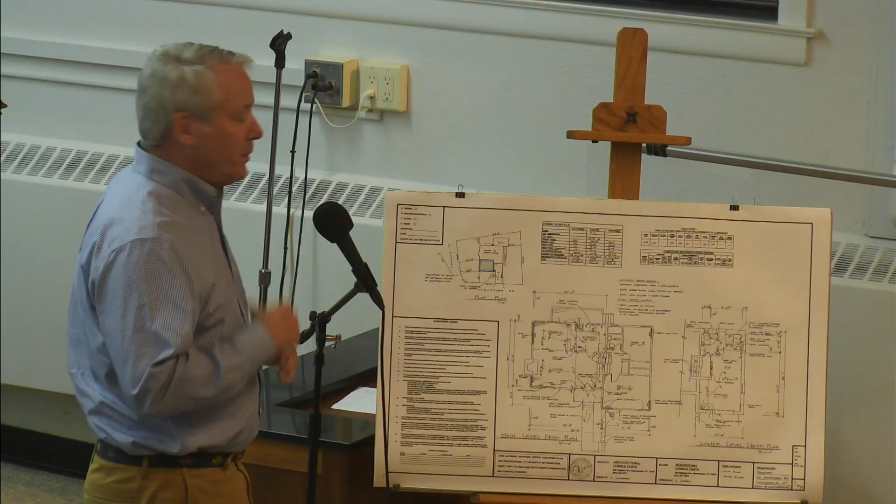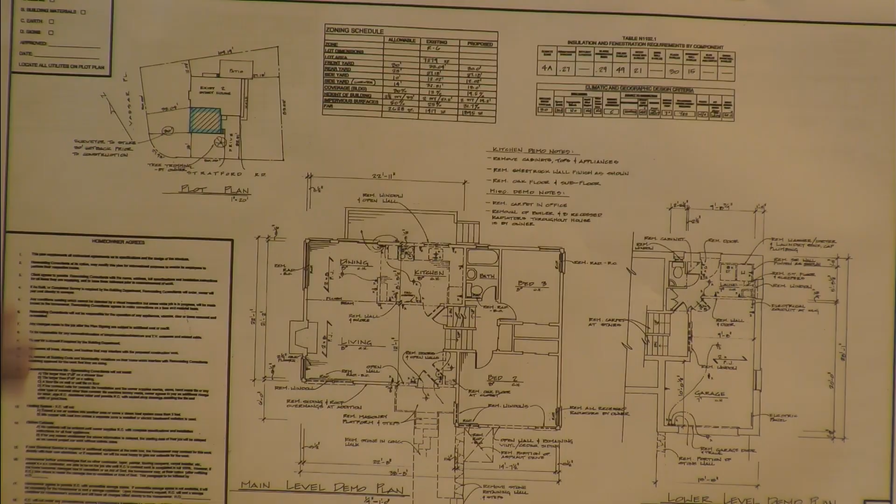We're on a corner lot, the corner of Stratford and Vassar Place, so we meet the zoning setbacks for a corner lot, and the addition is serviced by a lift. The whole reason for this addition is so that Mr. Harvey's 8-year-old son, who's mobility impaired, can come up from the driveway, come up a lift, and then get onto the first floor level, which, these are the existing conditions, and be able to access a brand new bedroom and bathroom that we're going to be building as part of this addition.

The first floor plan shows bedroom number 4, which is accessible on the main level, and it has a very large bathroom with the ability to roll into the shower and grab bars as needed.

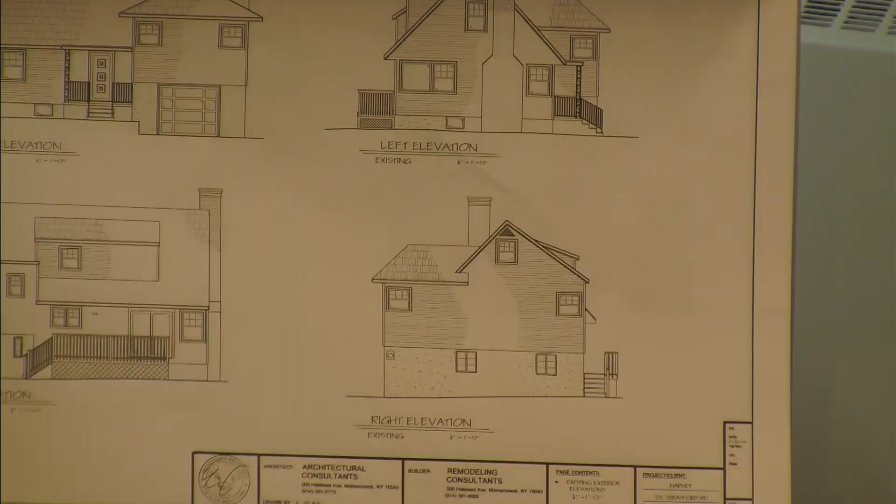So the challenge here was, of course, to develop something, an elevation that was pleasing. We did supply the existing elevations, and of course you have photographs. I'll start with the front elevation. Well, actually the rear elevation, we're just replacing some windows, and that really doesn't change much at all.

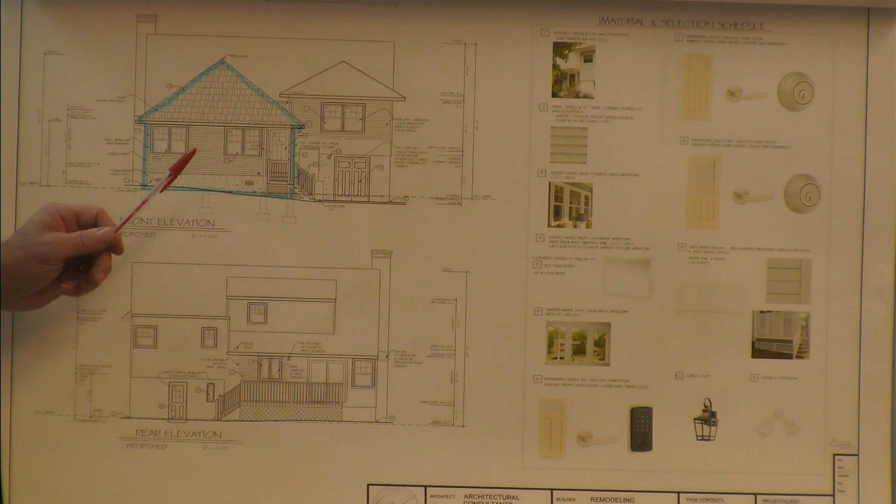So here's the front elevation. We have a hip roof that's going to be at the same pitch as the existing hip roof, which is a mid-level hip roof, so our fascia will be a little bit lower than the existing one. We have a series of windows going around, and of course we have a composite deck with Trex-type railing, which is accessible via stairs. Then behind that, we'll have the lift.

Our siding will match the existing, which is gray vinyl siding, so our new will match the existing. Roofing, too, will be asphalt shingle, timberline, charcoal gray, exactly like the existing. Same with the windows. We're trying to make it look just like the existing.

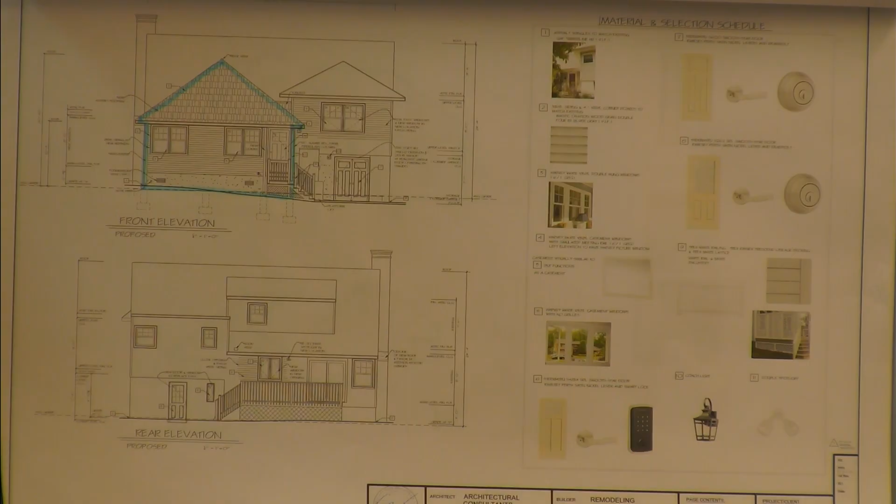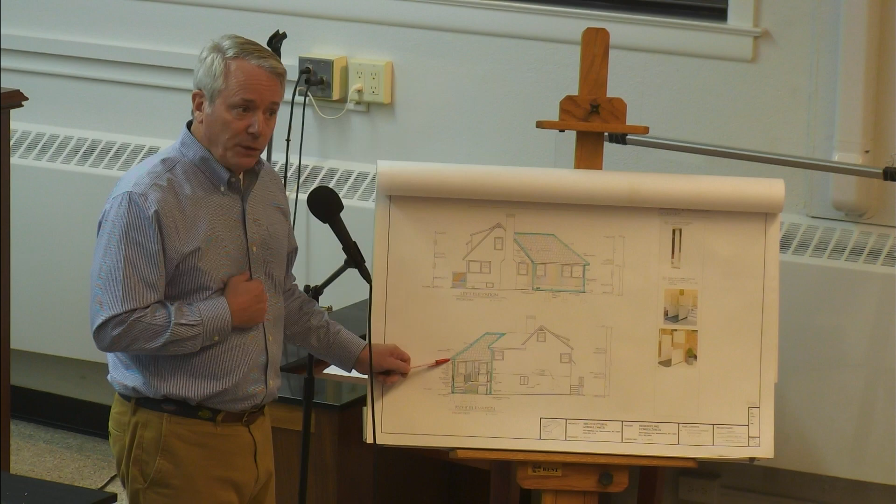Is there any exterior lighting that you're adding, or any additional information in terms of finishes? Yeah, the lighting that we're adding is going to be an area light that's on the corner column, included with it. So that's a security spotlight for the driveway. And then, of course, lighting that's in the soffit as you go down the porch. There'll be recessed lighting.

As far as the exterior of the building, what you've outlined with the blue, is that the new? Yes, I outlined in blue, this is the area of the addition. Did this here on my copy. I don't think you have that on yours, it's not outlined in blue.

Site plan wise, here we go. This is all the addition there.

I read through the application before, on the submission. Yeah, the only question I had, I think you addressed it, everything is matching existing, basically. Yes, right, all the finishes. That's correct, except for a new element that we're adding, like the railing and the lattice, which is going to be white composite material.

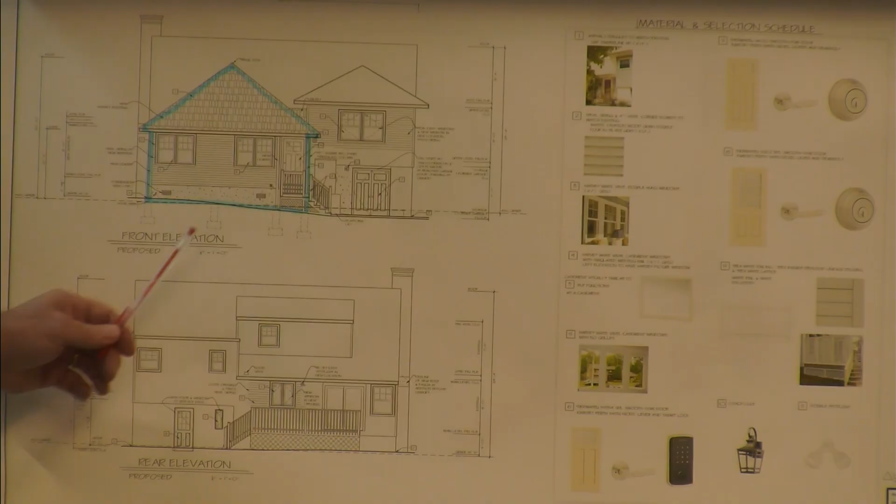Okay, and the doors that I see here on the material list, number 6 with the divided lights above, is that the front? Yeah, so we're replacing the main entry door, and that door is actually going to be set back behind, in that porch area. As you see here, we do have that listed. That's the one right there, number 6.

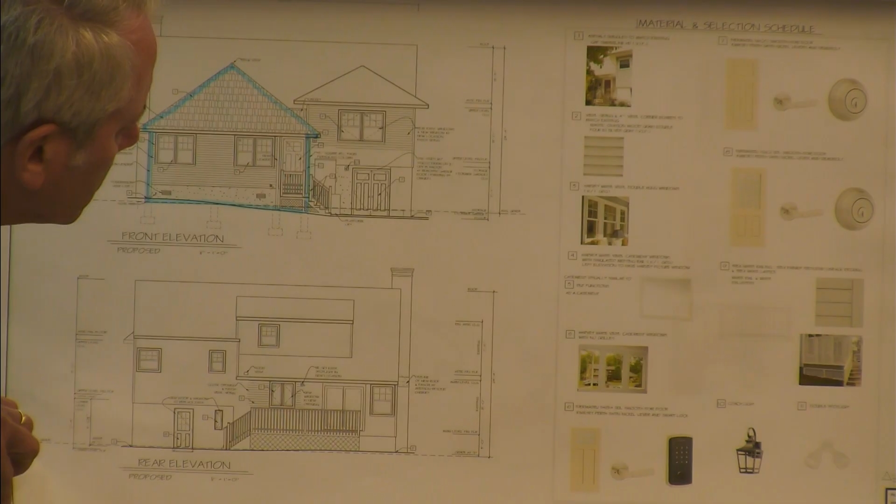Number 7 is for the, where does that belong? Yeah, number 7 is the back door that comes out in the laundry room. Another part of this project that doesn't really have any bearing on the front is that we're redoing the laundry room on the lower level, behind the garage. So you'd see that in the rear elevation on page 8A, right here.

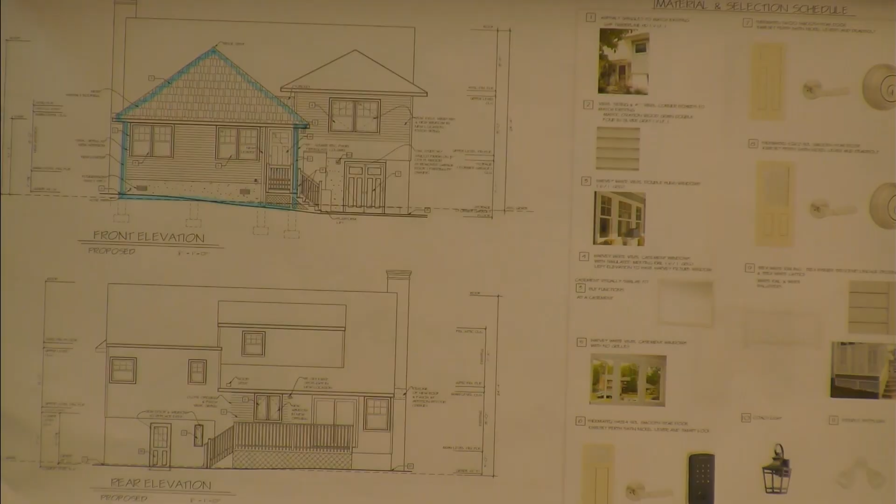The one on the rear coming out of the washroom, I think is door 8, right? Yes, this is door 8. So I guess she was asking where door 7 is, the solid panel one. Is that maybe interior? It's in the garage. Okay, great, thank you. Oh, I see, it's a double door on the front of the garage.

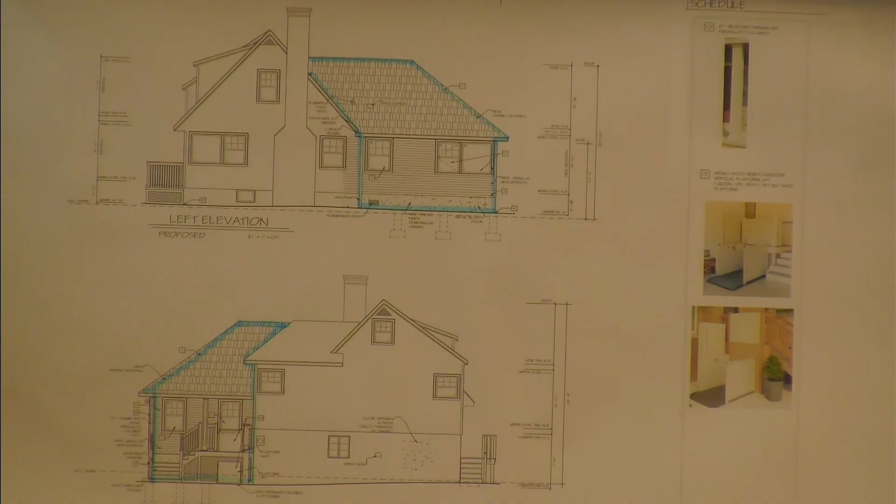So another part of this project is we're taking the front garage door, it's these two, and we're making a double door for storage access. So there's no longer going to be a garage door? That's correct, we're removing where the garage door was. That's correct, yes, that would be right over here.

In the current photographs, it's gray, and then everything's white, and the doors are white? Are they white, or are they this creamy color? The doors are going to come primed, and the paint will be applied at the owner's discretion. So you don't know what color the doors are? I'm going to say they're going to be white. Okay, that sound good?

I would recommend white to the client, and we can make that part of this submission, only because the other features of the house are white, the trim around the windows, things like that. The current front entry column is red, right? Is it red?

Just that it be specified, really. I don't think there's anything we have against the red staying, or... I mean, unless it looks bad, we're not going to ask you to change what you want. So if you want to do blue, that's fine, just specify it and give a color.

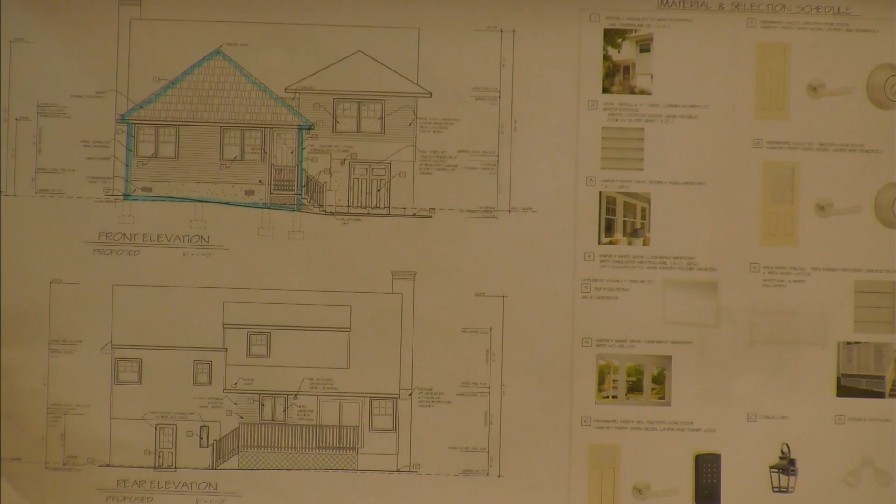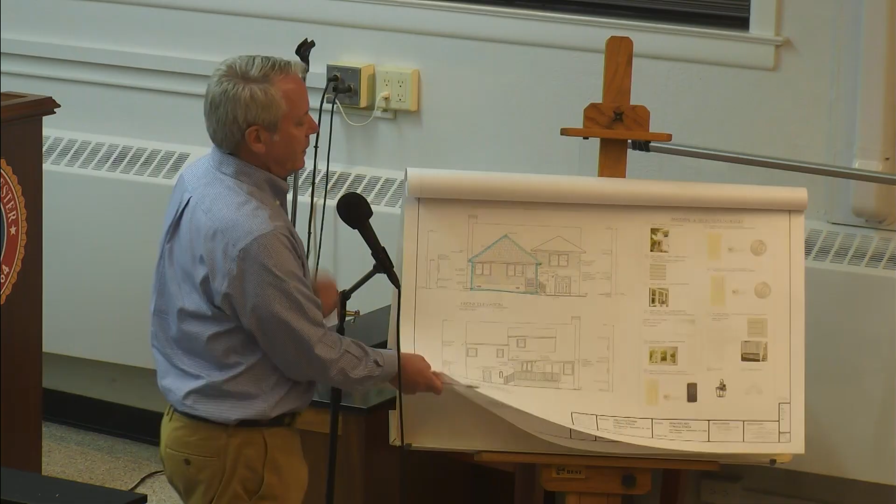Any other questions or comments, guys? Not for me. And the lift is also going to be white? The lift, as we see here, I honestly couldn't tell you exactly, but the selection we have here is a white lift, yes. All right, once again, we'll specify that.

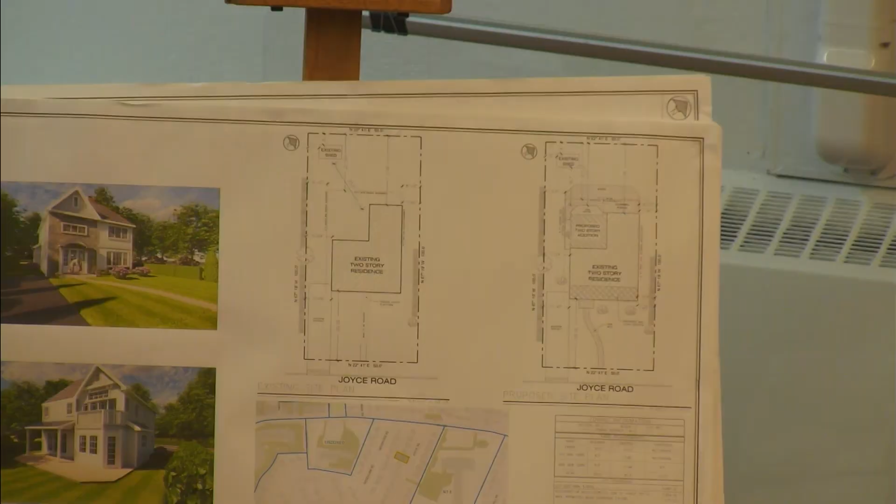The scope of work is we're proposing a two-story addition at the existing rear of the house, and we're also proposing a one-story, second-floor addition at the front to raise the roof. The house hasn't been renovated in many years, and we just want to update everything.

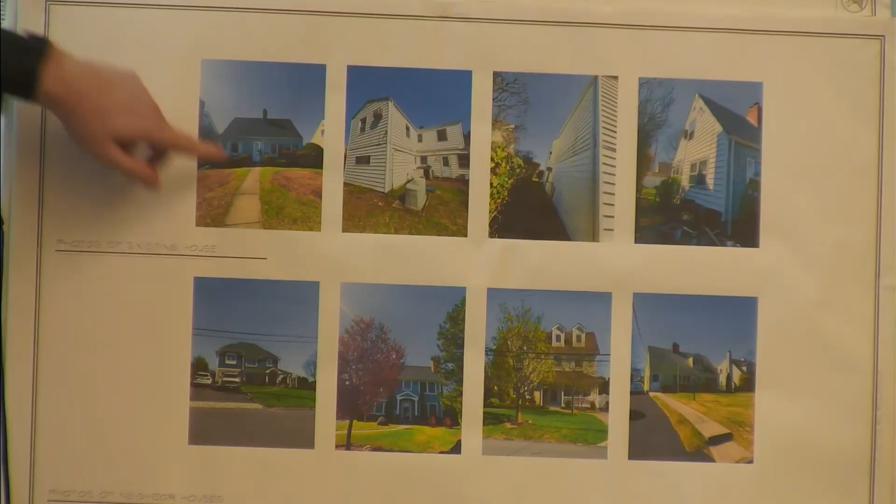I'm going to show a bit of the existing photos. The way it looks right now is just a flat, big roof right up front, and this is the rear area where we're proposing the two-story addition, and we're erasing the part here in the front.

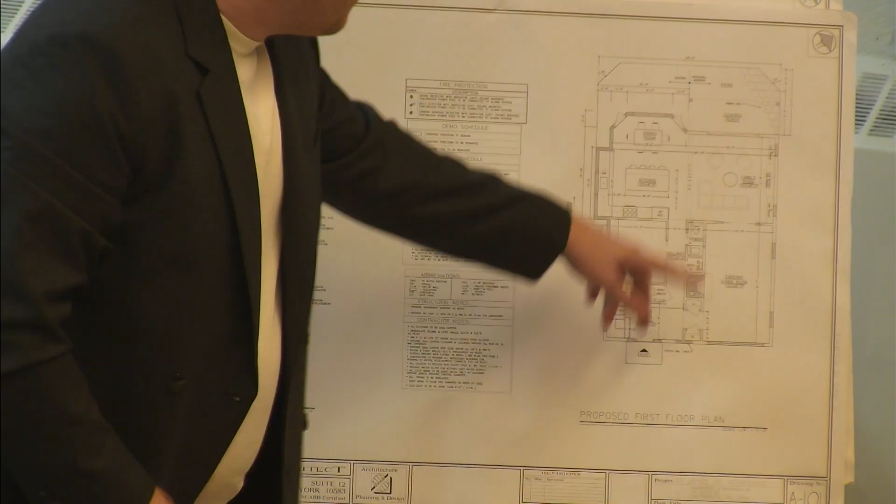If we go to the floor plans, when we first enter, we're proposing a two-story open foyer, and then we're going to have a big open kitchen, a family room on the rear. We're keeping pretty much the existing living room and the den as it was before.

Would you mind just using the microphone so that we can pick it up for the transcript? Sure, you can grab it. You don't have to take it off the thing. Yeah, you can hold it, it's easier.

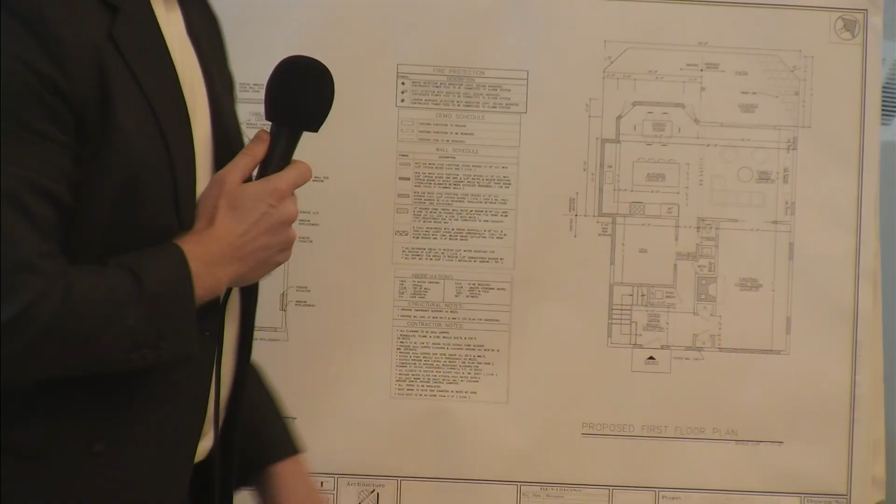As I was saying, we're keeping the existing living room pretty much as is because we have a fireplace that we would like to keep, and we're making a big open kitchen and family room with a breakfast and a dining area at the rear.

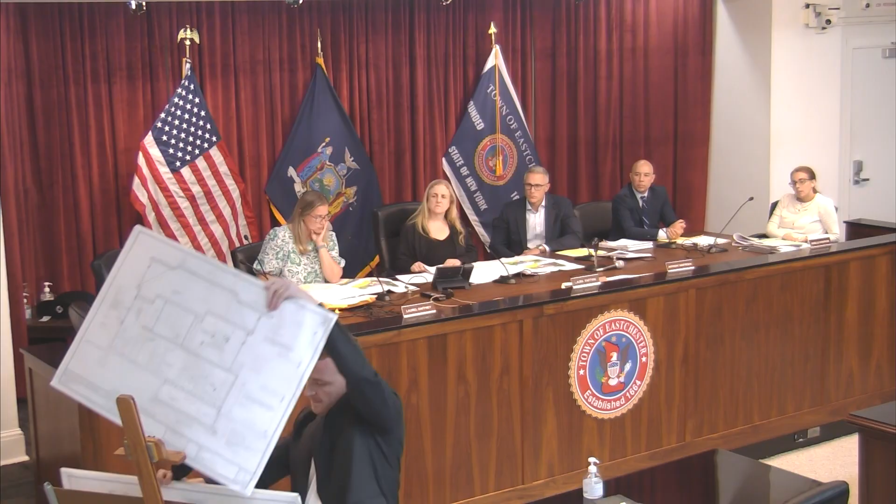On the second floor, we're proposing 4 bedrooms with a nice primary bedroom with a small balcony. We have 3 bathrooms and a laundry, which will be much better from what it was before to meet today's criteria.

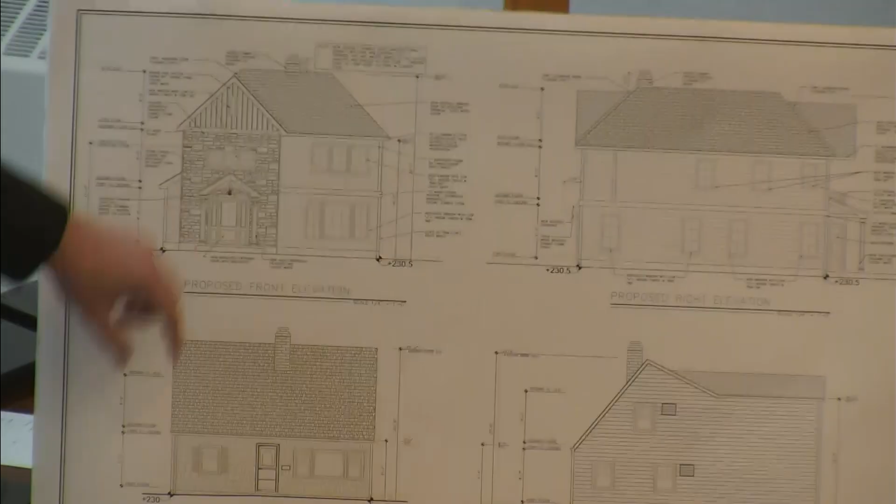If we go to the elevations, this is the existing where we only have this big bulky roof in front, and now we're proposing the 2-story entrance will be with stone, and then we're going to use HardiePlank, 7-inch exposure, and we're going to use board and batten again with 7-inch exposure.

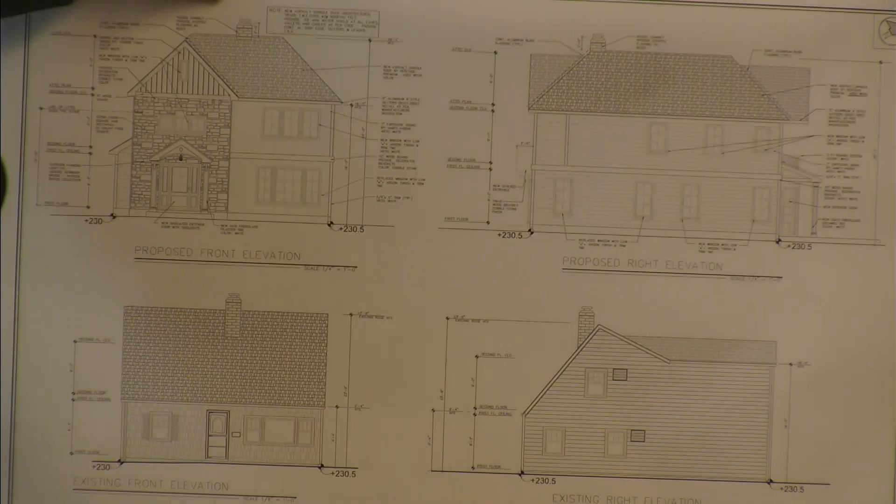The colors we're proposing will be Arctic white, and the stone texture basically is going to be rectangles and squares. On the side, we're just going to continue with windows. It was just a blank wall, so we're just putting some windows.

On the rear, this is a balcony area which is partially covered for the proposed primary bedroom. And here's the dining area on the first floor.

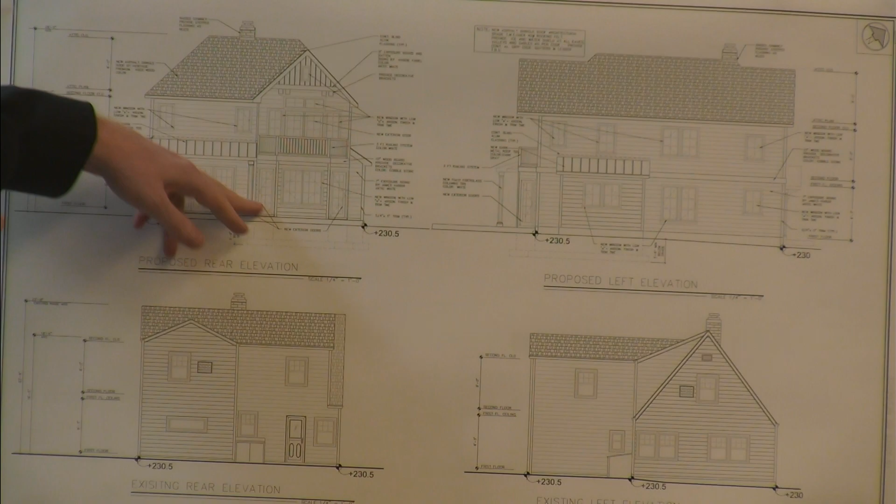I'm going to show a cross section as well. Our house does not have a basement, that's why we increased to get as many square feet as we could, because we're not proposing one and it didn't even have one. This is the primary bedroom area where we're increasing the ceiling to get a 10-foot ceiling in the area.

Here's the 3D renders where we can see the stone and the finishes. I also brought all the finishes right here where we have, this is the stone that is going to be used. I only brought a piece, but I have the catalog as well.

This is a HardiePlank that will be 7-inch exposure. And then on the upper part, on this portion, we're going to use the board and batten, which will be put on top of it and nailed to it like that.

On the back, we also have on this portion here a metal roofing where it's going to be a dark gray color, and I brought a color sample as well for it. The main roof will be asphalt shingles by Heritage, in the aged wood finish. These materials pretty much match the neighborhood, everything, all the materials are used in the neighborhood as well.

So the whole outside is going to be new HardiePlank? Yes, the whole exterior? Yes, everything is going to be.

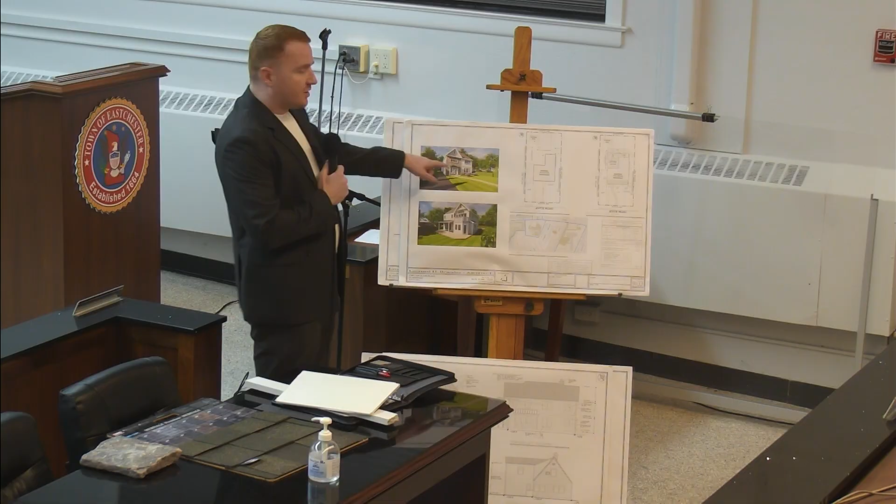And the windows will have the white trim, 5-inch Arctic white to match the color. We're also going to have a 10-inch board, which is a cobblestone finish, just a bit darker to match with the stone. This part here is like a 10-inch trim coming around. And that trim is darker? It's a bit darker versus the Arctic white, just to break it up a bit.

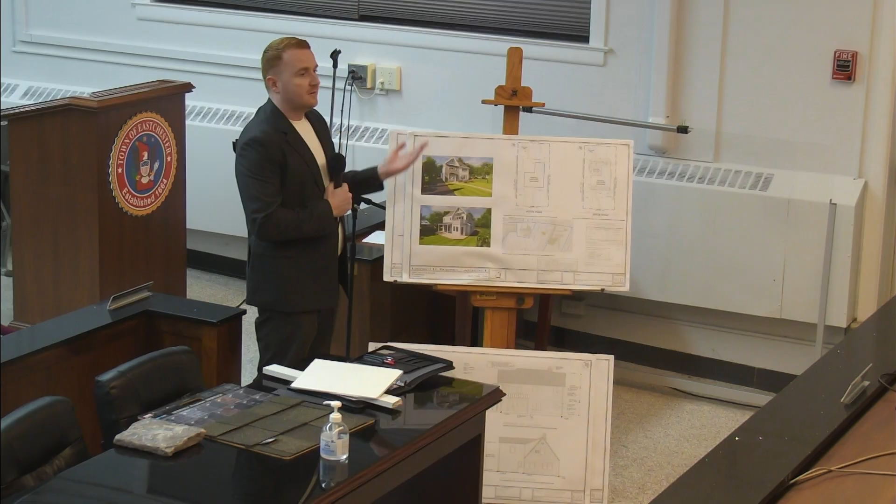All the existing windows are, of course, being replaced to insulate it to match what was before. We're replacing the front windows, everything, and the rest is new.

And the roofing you brought, it's gonna be that color? Because on these renderings it looks much lighter. I think it's from the print, but yes, it will be the aged wood color. That's what the owner liked as well.

I had a couple thoughts on this. Do you have any other stonework planned for the site or anything else? Because when I look at this, that stone jumps out at you, but there's nowhere else to tie it in on the site, and with only that front face there, it looks very much like a stone veneer.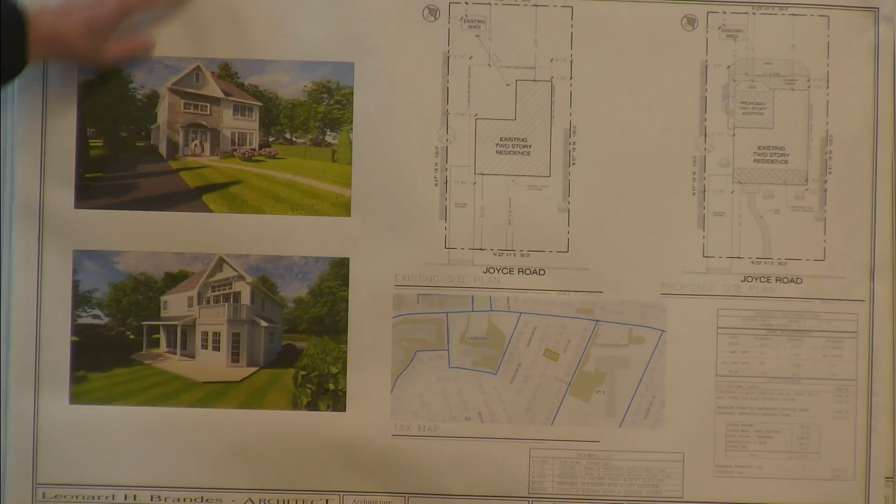It feels a little bit to me like there are a lot of styles going on -- there's stone, there's board and batten, there's HardiePlank, there's trim, there's standing seam roof, asphalt roof. It feels a little inconsistent to me around the perimeter of the house.

Well, the roof, I can easily make the roof -- we just thought to bring something nicer. It's even cheaper for us to make the roof all the same, if that's something you'd want. We can easily make asphalt the whole thing on the back, but we thought as a nice feature, probably to break it up a bit.

And even here, this board, it's not that different in color -- it's just like a trim board, just to break down the two levels a bit. It can even be removed if you think that's too much. I can easily remove it. I don't think the trim bothers me that much.

I don't know if it's the actual rendering that's looking a little cartoonish with the stone. Yeah, I also have the catalog with the stone -- it actually looks better than the rendering. I wanted to show you. But I understand what you're saying.

It is a little mishmash in terms of -- also the back, and I know this is the back of the house so you don't see it up front, but the part above the balcony just has a lot of windows, and then that big piece of kind of craftsman trim, the bump out -- it feels a little crowded, all of that together.

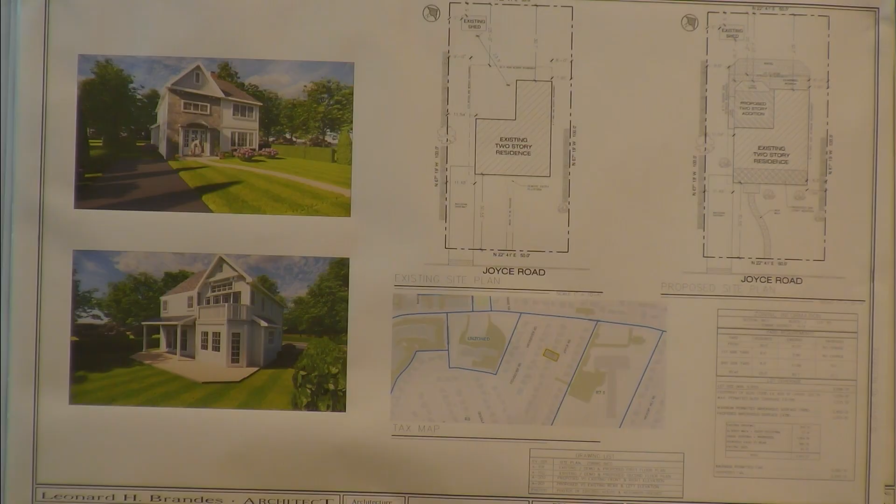I wonder if the whole patio being exposed might be better, with something like a pergola instead of the roof there. Just a consideration, but okay.

Yeah, there are a lot of windows and combination of windows, almost like on both the front and the back. There's just not enough repetition, not enough consistency, yeah.

Things get hodgepodgey. Here on the back is basically the family room, kitchen, and breakfast area, so we do need a window, and we want this big slider door that's gonna open. Basically, it's not the amount of window in general, it's that—for instance, the sliding doors underneath the roof have 3x5 lights on each of those windows.

Then you go to the ones up above on the porch, and you have those with thinner lights around. And then down below, the styles are all different mix—there's nothing consistent with the lights in the windows throughout those.

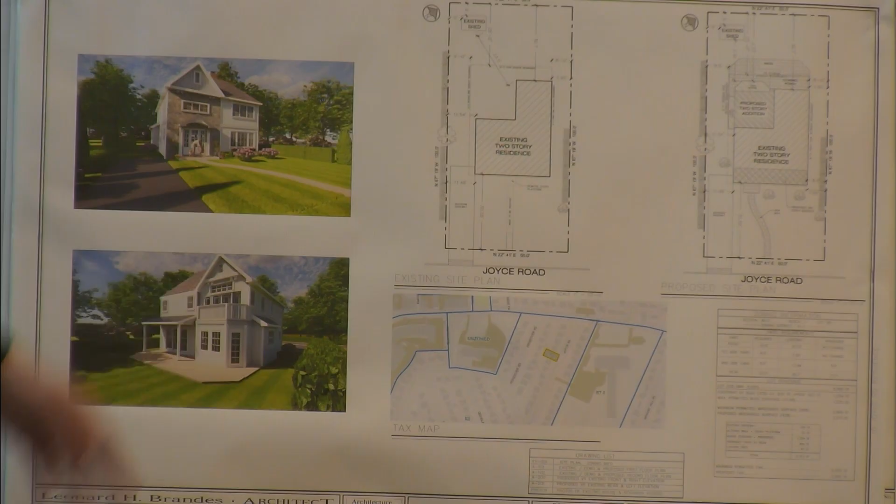We like to use a 7.5 inch on a 2x8, this way you have it long for the future. That's not shown here, that's inside basically. I mean, we have room for it, we haven't done all the CDs for this so we can adjust. We're definitely gonna adjust the size. It's gonna have a 7-8 inch space minimum between there, so that window is gonna get pushed higher up.

Also, I think another thing with the mullions that's throwing it off is that even though you have the two transoms above, they don't correspond - the width of the glass is wider than the height below. You need to do something to make it look like they belong together. It was only because we have a cathedral ceiling coming in, so the roof is angled. We wanted to get the whole thing but my structure doesn't let me because I have the rafters inside that are 2x12s, so that's why we brought it to the center point.

So only the slider has the windows above, and the two side ones don't have it. That I don't mind, but if you look at the center ones and the way the transoms are divided, they look... I don't know if maybe you can achieve that, because the door has more trim, right? The door has more substantial band of trim around it.

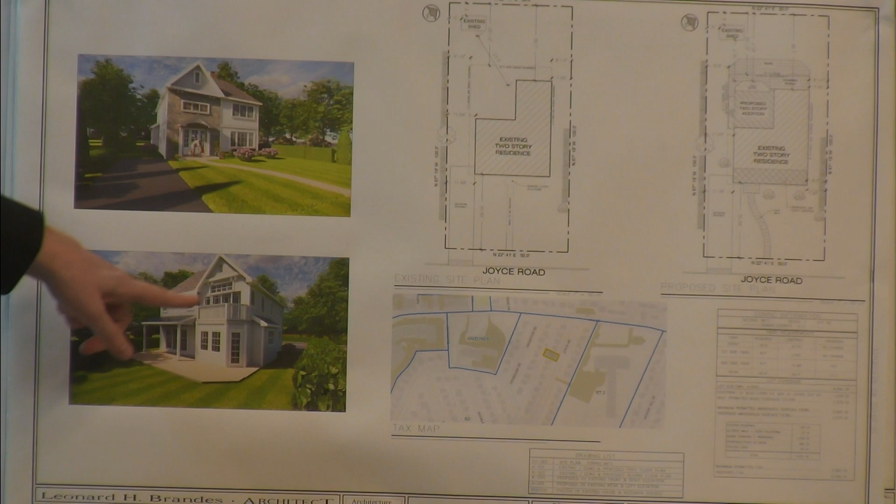Can the windows be... well, probably when we do that, because these windows come with a transom, so I guess we can look into that. Might be even easier to eliminate that problem with a space between - I'll have to look at a different door system, similar but maybe as one piece instead, and then it'll look like it's all one. Even that way, when I change the grills for this, it definitely is going to match - all the grills will match together with this as one piece. So yeah, I believe that should be fine. We're happy to do that.

Anything to make the goal be consistent - for the divided lights to start to look like they all belong together, like they all came from the same store, if you know what I mean, like they have the same flavor.

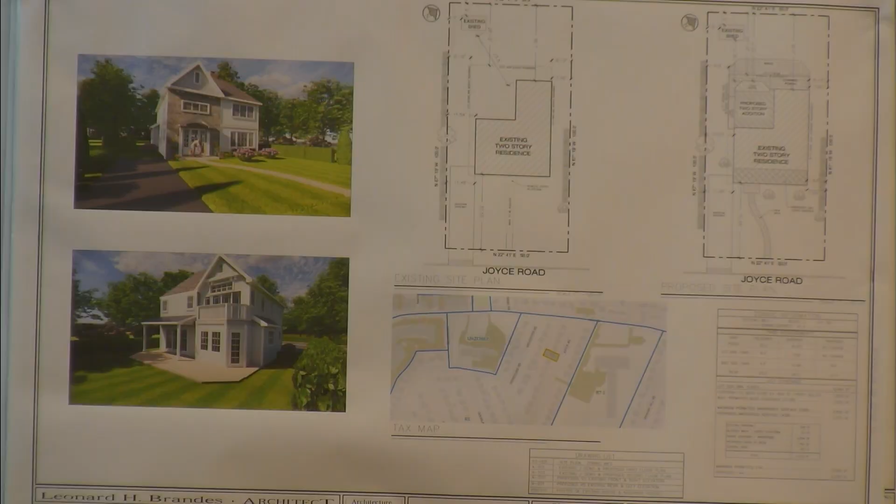Is this something you're going to want to see again, or do you want to pass this on to the planning board? Because you might want to give the planning board more specificity to what you're looking for, if that's the case.

I'm looking at proposed left elevation, existing, okay, all right, so these are different, but this is old - 6/1, okay, so we don't have to look at those.

I'm not so sure, but I mean we can definitely do the adjustment. If we're to go to planning, we can take care of this stuff. They're easy things to take care of, and we hope to go through, since even the owners are in a rush, and we lost a few times during the summertime, so hopefully we can.

I understand your pain, but I don't know, well, okay. We could be really specific about what we're doing here, or what we're recommending that you do here.

Have you taken notes so far on it? I can't say that I have specific notes as to how I would craft a condition with specificity that the planning board might follow, or that we can confirm has been completed.

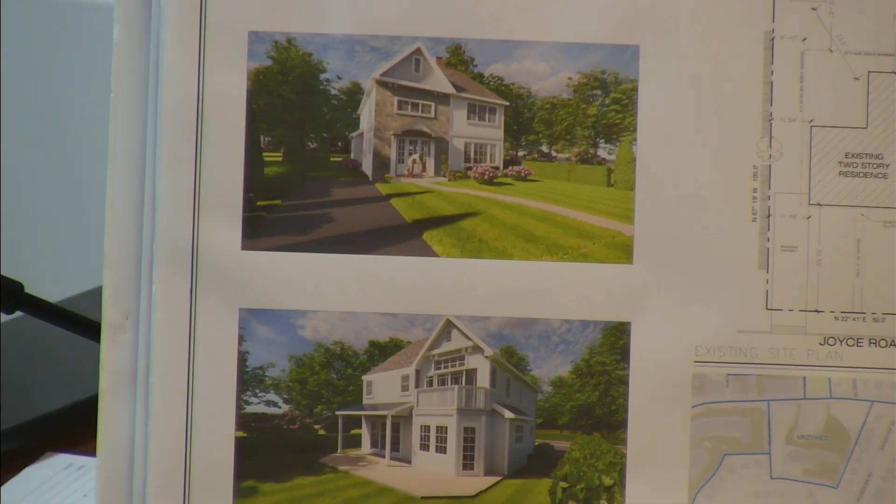I'll check, I'll make room. I have, like I said, this is an 811 door, the triple. I might have to push it a bit more to this side, but I'll have to do it if I have to do it. All right, so that's the rear elevation, the recommendations for the rear elevation.

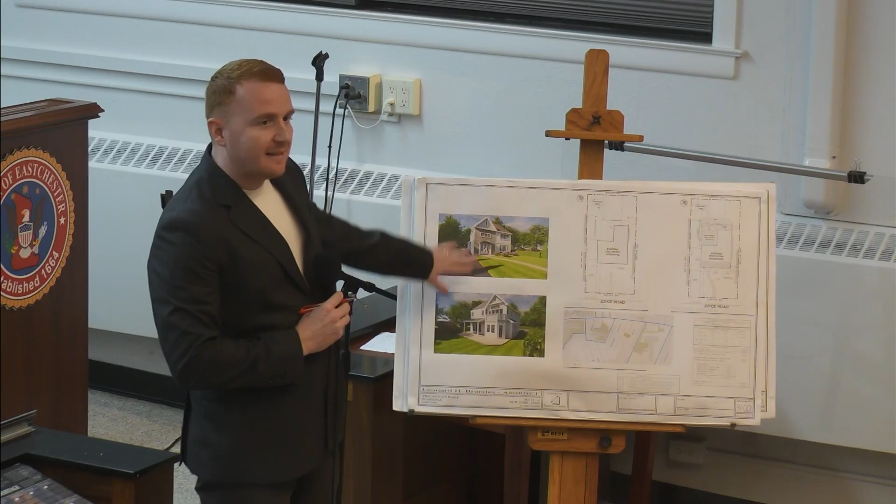And then for the front elevation, just make sure that the rendering shows the masonry window installation. I'll definitely have that prepared, that's needed, basically all the windows, the way they kind of look like they pop out a little bit. This rendering looks a little cartoony, but that's, one thing I just noticed also.

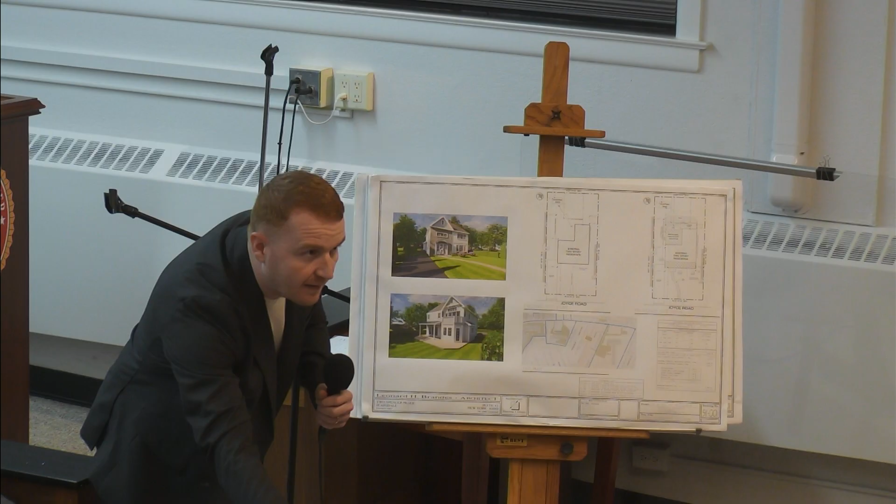Do you have lighting information? I do have it, I printed a light for the front that we're using, I can share it with you. And then what is the patio gonna consist of? Just regular blue stone on the back. Stone, yeah, okay.

And I keep coming back to this, we selected this roof light as well for the front, we're asked to bring it. It's an antique brass, from the Antique Brass Collection.

And is there gonna be any lighting in the back on the patio? We probably put, like under the covered portion, we're gonna put like high hats under it. Simple, they're not gonna be visible basically. Is that one for the front door, by the front door area? So it's under the, yeah, just hanging in the center.

Yes, okay, so make sure you include that on the elevations, especially here on this, because it looks almost, I don't know if you have enough room for that. I'm not sure if you have enough room to hang that there, do you? Well, it's not very big, doesn't drop much. It'll be tight, it's a small one. Okay, so definitely put it in.

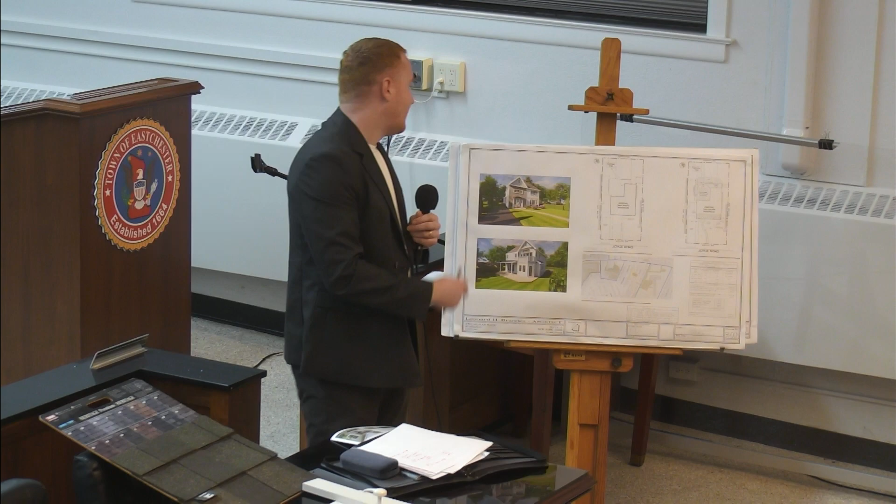And then, are we talking gutters on this house, or they don't need any? Oh yeah, there are no gutters drawn, but they definitely have gutters. Okay, so those are not indicated anywhere, right? I didn't have them on the 3D shown, but I have it noted on the elevations. Basically, I have like a roof note which includes the gutters and leaders and everything. Okay, I don't think I see leaders. No, I don't see them either.

So I assume there's a drainage system going in somewhere? Well, we have the storm water prepared that we showed to the planning. I didn't take it with me, but we do have it. All right, so make sure that that's noted as well for the planning board. And any patio drains? Yes, we do have that. We did show them, I believe, from the first round as well, and they were good.

No, I'm talking about the gutters and leaders. Yes, yeah, it's noted, I do have that. It is as a note on elevation, but I'll make sure to show it even in the rendering as well, since I'm redoing that part, so that's not gonna be a problem.

And then, yeah, I don't love that either. That one window in the board and batten section, the peak, in the front, can we eliminate that? I can take that out. Yeah, I think it'll look better without it. There's just so much going on.

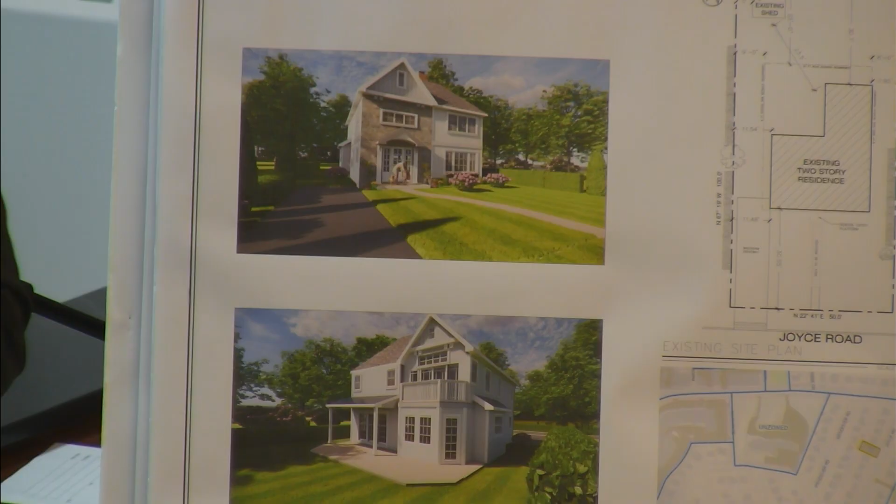Okay, why don't I go over the conditions, and then we can proceed to the public hearing portion.

On the rear facade, the windows and doors should be consistent in terms of the mullions to present a cohesive appearance - that's number one. Number two, the lower sliding door should be a double door to match the upper door. Number three, the transom on the upper door should include just as much trim as the door, so it looks like basically one large rectangle.

On the front facade, the trim for all the windows should be set into the facade and should not protrude from it, and the rendering should be updated to depict that accurately. The light fixture should be shown on the elevation and the rendering. The leaders and gutters should be shown on the elevation and rendering. And the window in the board and batten section of the front facade should be eliminated.

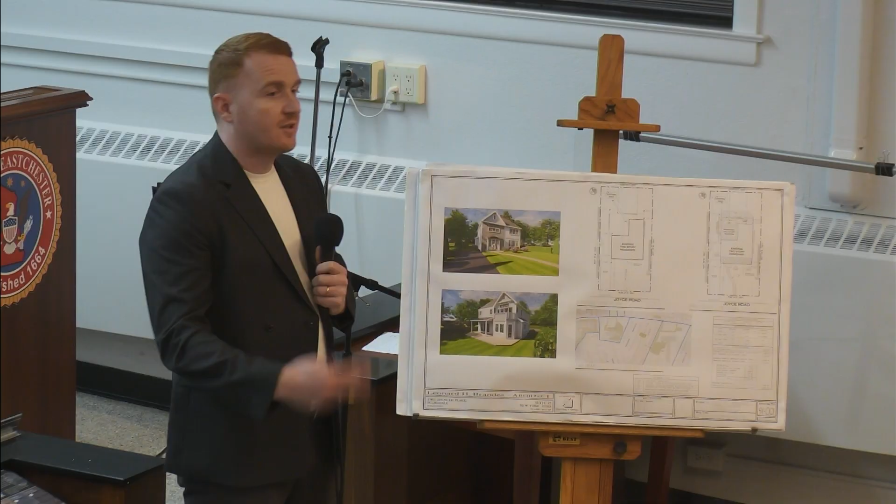Correct, right. And I know this isn't so much for us, but do you have the location of the AC units and where all that is on the plans? I don't have it for this part right now, but if we need it, I can show it. Actually, for the AC I do have it in this area - let me show it in a section. Hold on.

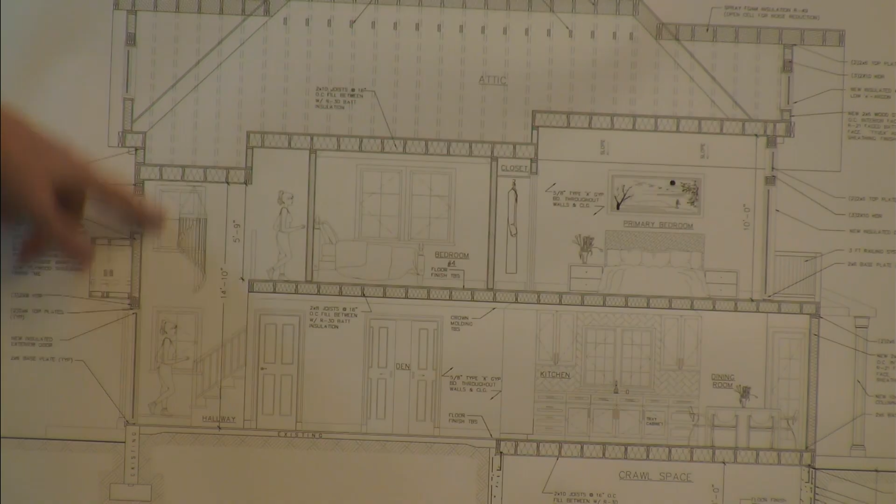So over the foyer, over this part, we're going to use this area where that window is being removed. Basically we're going to use this for the AC unit, for the air handler, so it's going to be in the attic, which will be an insulated attic. That's where they're going to go.

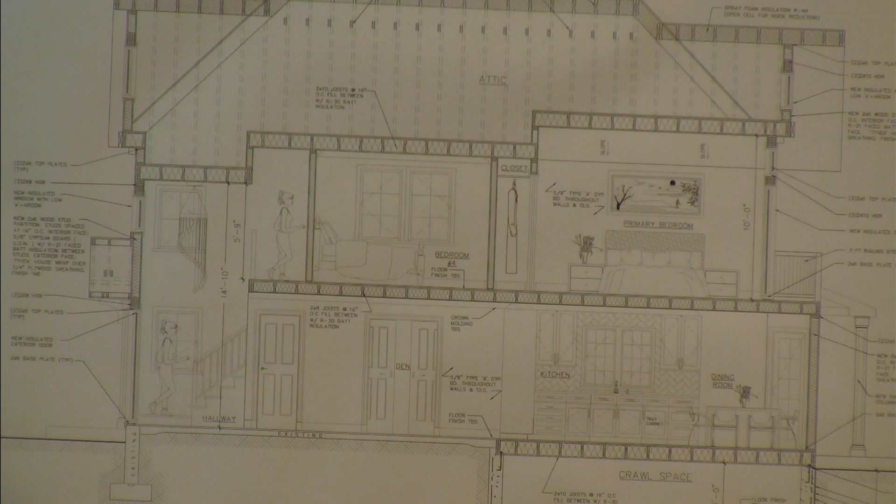So then there's nothing outside? There's the compressor, it's probably going to be on the side, we'll show the location. We haven't coordinated yet with a mechanical engineer for that, where it's best for him, but we can finalize that for the planning board. Yes, the planning board will need to know where that is, and if it's on a pad, the pad will have to be included in the impervious surface coverage calculation.

We'll add that as one of the conditions as well. Okay, so with that being said, we shall open it to the public hearing.